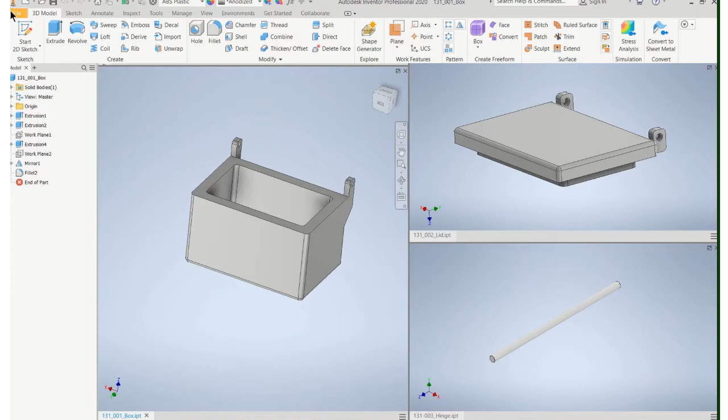In this video, I'll show you how to put multiple details onto one drawing sheet, because these are three relatively simple parts. And think about that shaft. I wouldn't want to make a single sheet with just that shaft on it. It's just not that much involved in it. So let's make a new drawing.

Maximize that. I'm not going to use a D size though. In this case, I'm going to use a C size. So don't go bigger than D size. Either use a B or a C. So I'm going to use a C size piece of paper. And let's decide what we want to do. Let's start with this. This is actually the box itself. Okay, so

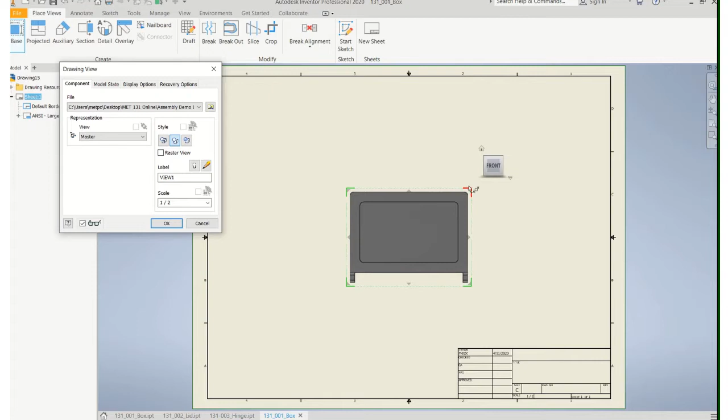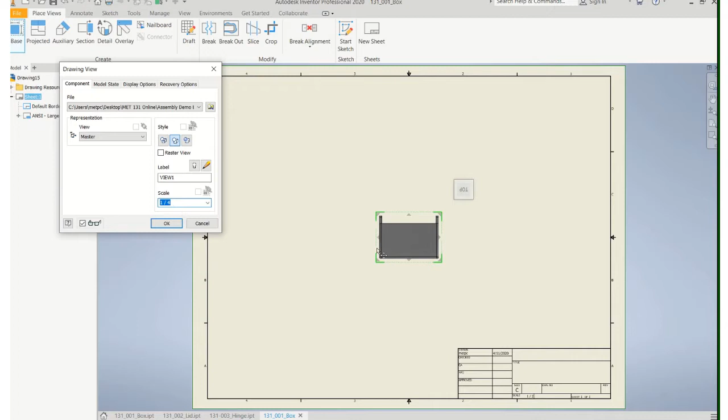let's find a view for a front view. Remember, most information, longest dimension, fewest hidden lines. That's what we're after. I think that's a good front view. Now I'm going to have to scale this down because I'm going to try to put all these parts on the same sheet. So they'll look kind of small, but it'll work out. Let's put this one up here.

Okay, I'm going to turn on my hidden lines though. Okay, so there's the box. And as we do, we're going to label these. Let's capitalize everything. Part number 131001, and let's do this so it centers. So let's go up here and click on this center thing and say okay.

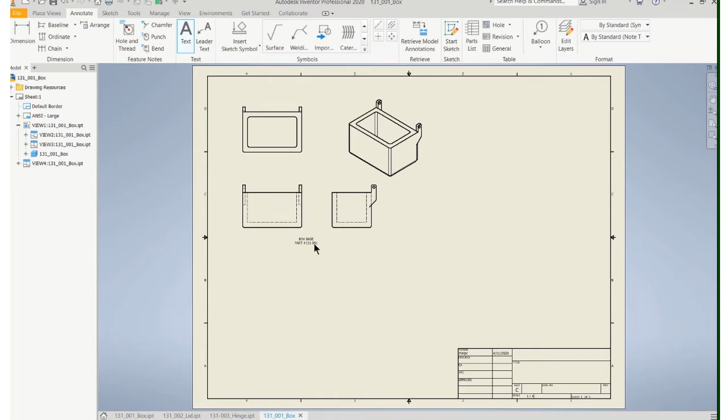And that's kind of small. Let's adjust that font. Let's double click on that guy, highlight it. And if you come up here, you can make that font bigger. Say okay. Okay, that looks good. Gonna have to probably play with this to make sure we have enough room, but that's a good start.

Okay, let's place views. Let's put our lid on there. So let's find the lid. And I think the quarter scale looks about right.

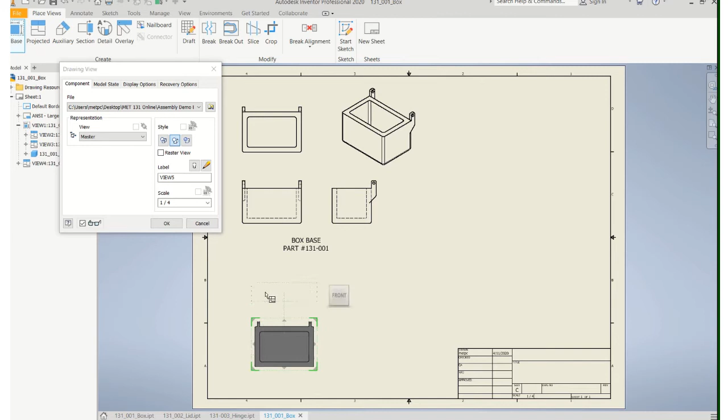I'm thinking, yeah, let's slide this over here. The base of the box is gonna need the most amount of space, and we'll do that, and then we can put the shaft up there. Oops, I should move the name over there. So since I have figured out this is a good scale and all, the easy thing to do is just copy this.

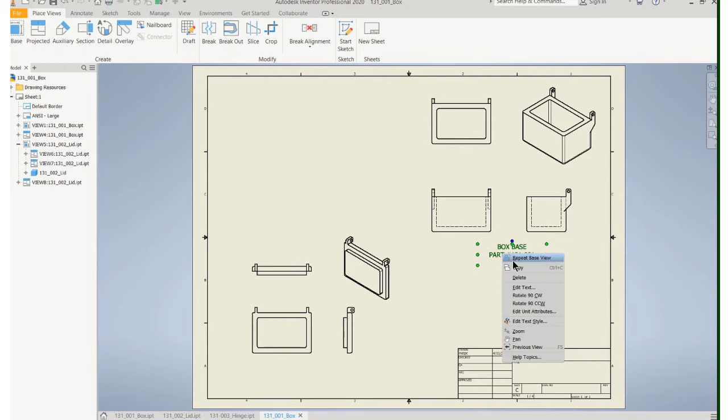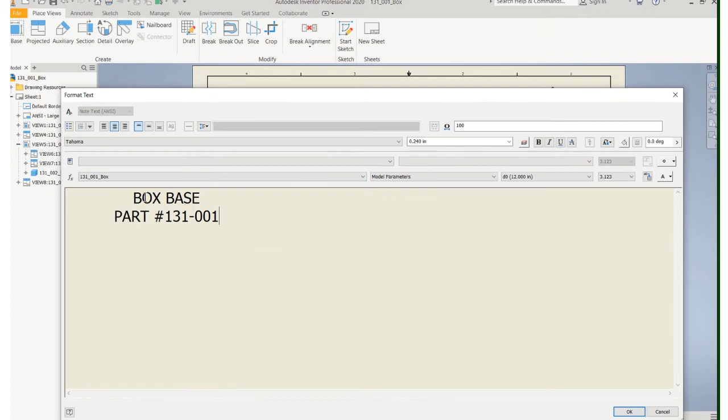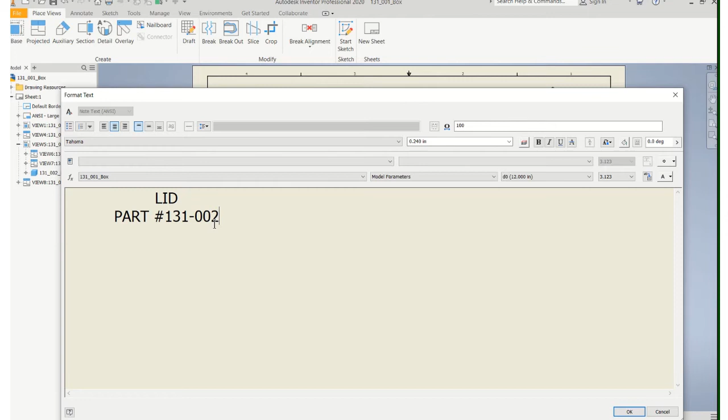Just right click copy and right click, oops, try that again. Right click copy and right click paste. Computer is doing something weird. There we go. And then all I have to do is edit that. So we'll change that to the box lid, or it's just called the lid actually. And change the number. Obviously you can just recreate the title if you want, but I got the font size and everything set.

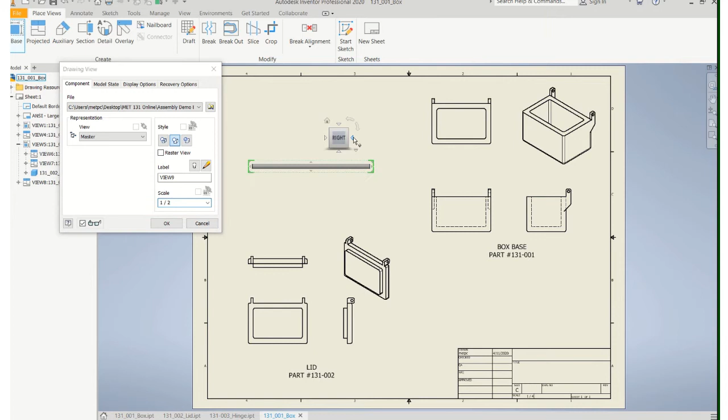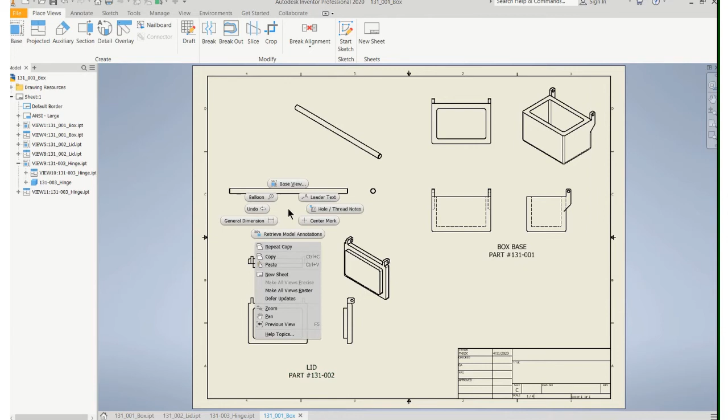Okay, let's put the shaft, or I'm sorry, the hinge on there. And we're gonna have to scale that down. That's actually probably what I'm gonna need. The top view would be exactly the same as the front view, so I'm not gonna put a top view on this. Let's see, and again we need a title for that, so let's right click, copy, right click, paste, and I'm gonna call that

break with tradition. We'll put that in the upper left just because it's going to fit in this space. So if you can do this, it's great because you can get it all on one sheet of paper. If not, I'm just talking about down the road, you don't have to always jam stuff on a single sheet of paper. On this assignment, I want you to get everything on a single sheet of paper.

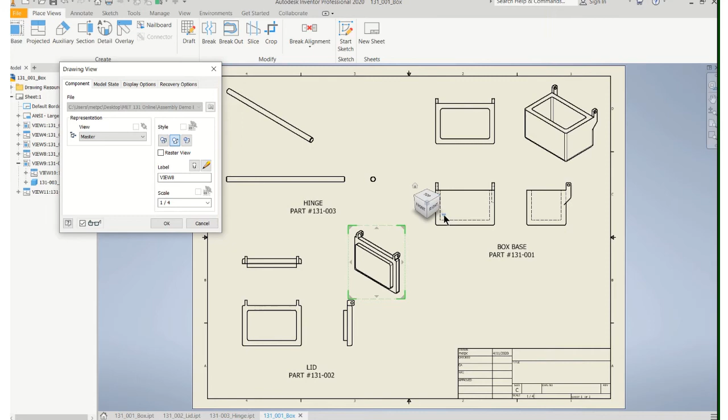I don't really like that view. Let's go in there, right click and say edit view. Come down here and click on that little right hand corner thing, do a custom view. And that's actually the view that I want. There we go, that's better. And it doesn't take up so much room either.

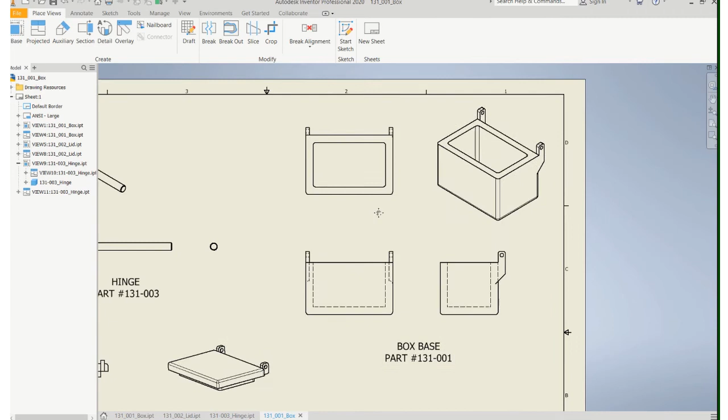So now we'll just have to go in and dimension each one. Now you might say, my gosh, it's going to be so small. Just zoom in on here. Everything will be fine. You can fit your dimensions on this. There aren't that many dimensions. So you got room here, you got room on these. So treat it like any other drawing. Put all your dimensions on there. Put your center lines and center marks, as we always do.

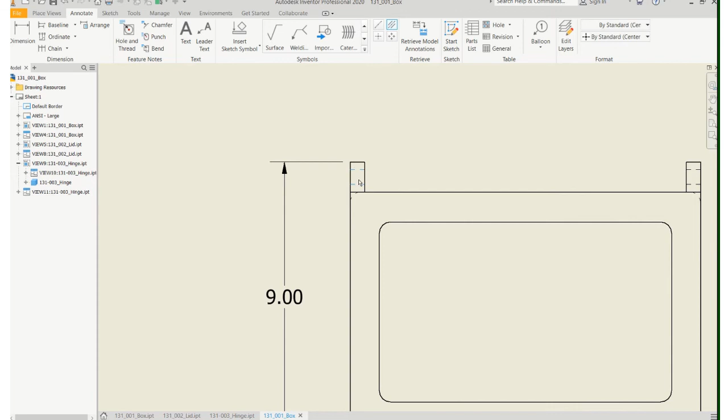Dimension all your features. Now one thing we're going to have a problem with is we need to call out the depth of this pocket. We can't do that because everything's hidden lines. So let's just delete that view and add a section view. The section is going to come off of this view, so click inside there and then find the center, come up above, click it, down below, click, right click, say continue, and then just pull your view over there.

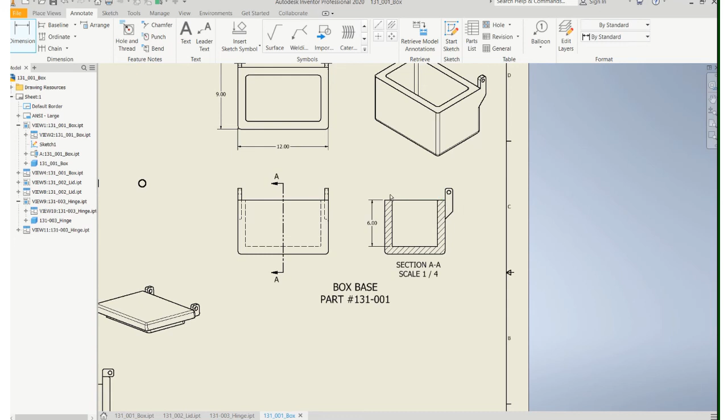So now we have the perfect place to call out that depth, and we're not dimensioning to a hidden line. And you can still call out all the dimensions to all the features that we have there, and so forth. And then on the title block, just call it something like box detail parts, and you can call out what they are.

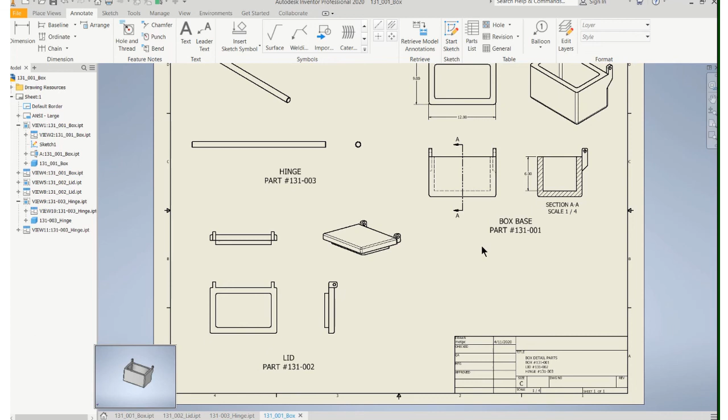Okay, oops, I didn't put my name in it. Put your name in there as well. So we want to put all the dimensions on there for those parts. Okay, so you can turn in your full assembly, exploded assembly, and then this one drawing that has all of your detail parts on it. Again, don't forget to put all your dimensions on there.